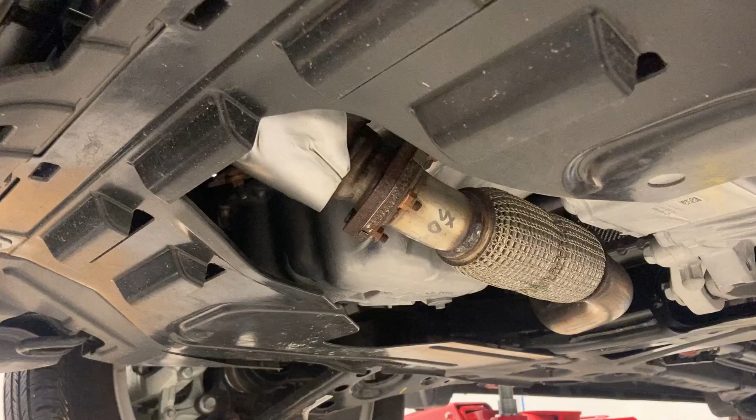Starting out, we're going to be looking at this 2017 Buick Encore. Starting at the exhaust, we go from the header to the first cat, to the flex pipe, to the second cat, the first muffler, down the exhaust tube, into the secondary muffler, and finally out the tailpipe.

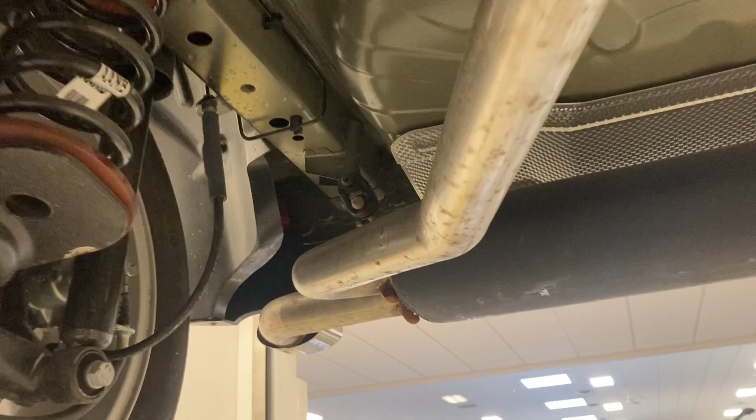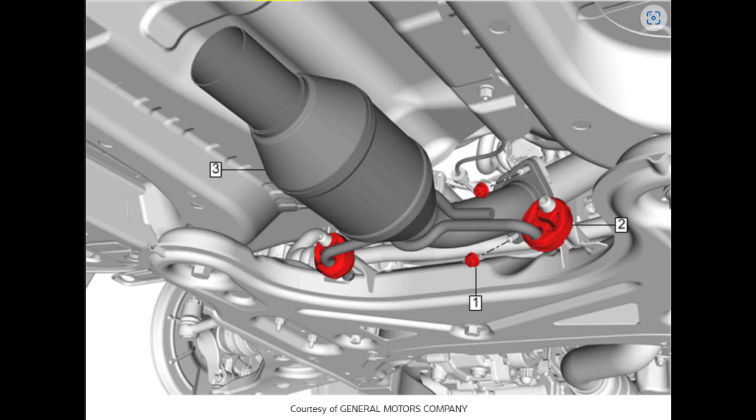The vehicle has two catalytic converters. This is the primary that connects to the outlet flange of the turbo. The secondary cat is slightly further down the exhaust after the flex pipe. Both of these are classified as warm-up three-way catalytic converters.

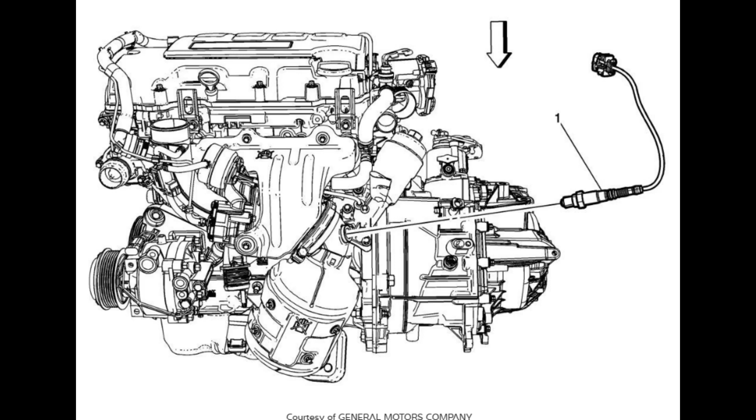Taking a look at the oxygen sensor locations, we have O2S11 here before cat 1 and O2S12 after the first cat, leaving the second cat unmonitored.

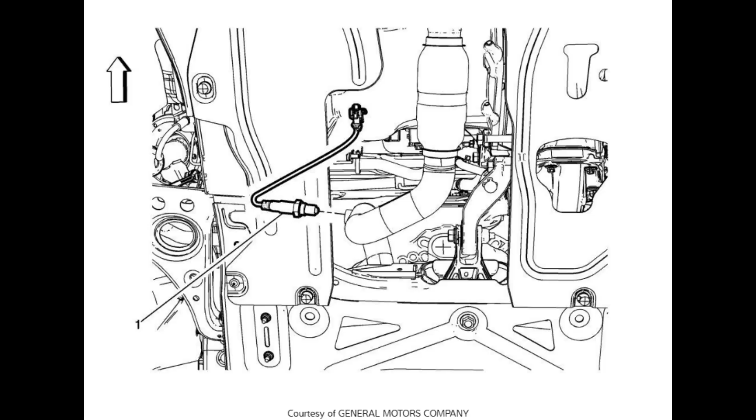Jumping into the tests, clarify that due to the heat shield, we'll be testing the pre-cat 1 temperature through the opening above the heat shield at the header.

Look at the results from our 10-minute idle temperature test. Ambient temp starting was about 70 degrees for both cats. At minute 1, we noticed that cat 1 inlet and outlet have a large difference. Inlet is much hotter at 176 than the outlet at 86, about a 100-degree difference. Cat 2 has less of a difference, actually hotter on the outlet by a few degrees.

Going down to the 5-minute mark, we're at 285 in the inlet, 136 at the outlet, about 150-degree difference, hotter at the inlet of cat 1, whereas cat 2 is a much smaller difference, about 5 degrees, 108 going in, 103 coming out. Down to minute 10, 294 and 194 for the inlet and outlet of cat 1, about a 100-degree difference, colder coming out. And cat 2, 122 going in, 106 coming out, only about roughly 20-degree difference.

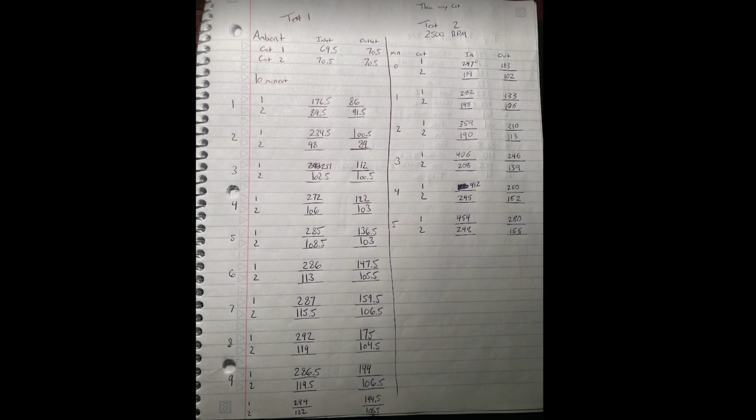Taking a look now at the temperature by foot at idle. Foot 0, 348 degrees at the exhaust manifold. This is our hottest temperature. Foot 1 is the outlet of cat number 1, 275, still considerably hot. Foot 2, 198. Foot 3, we increase in temperature, still just in pipe.

Foot 4, decrease in temperature. This is the inlet to cat 2. Continues to decrease until foot 8, where we increase about 10 degrees from the previous foot, and that is just in bare pipe. Continues to decrease and then finally increases again at foot 10 at the inlet to the muffler, and then gradually decreases to 91 degrees, the coldest temperature at the tailpipe.

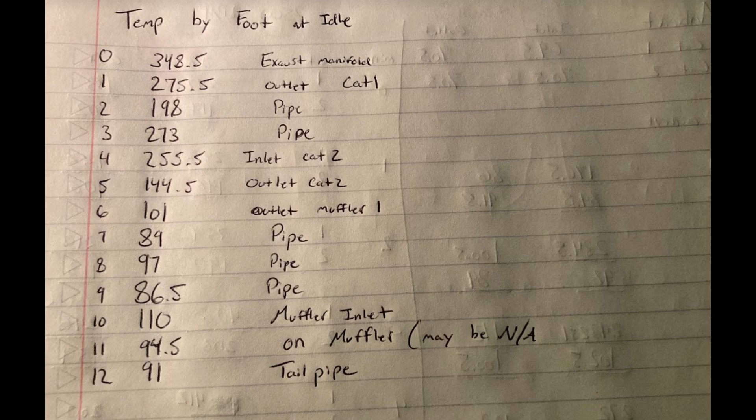Next test, we moved on to a 2007 Buick Lucerne with a 3.8 liter. This car has a single three-way catalytic converter. You can see my partner here, he has his propane hooked up to the intake, and we're going to shoot some in there and monitor what our cat temperature reading says. So I'll have him do that now.

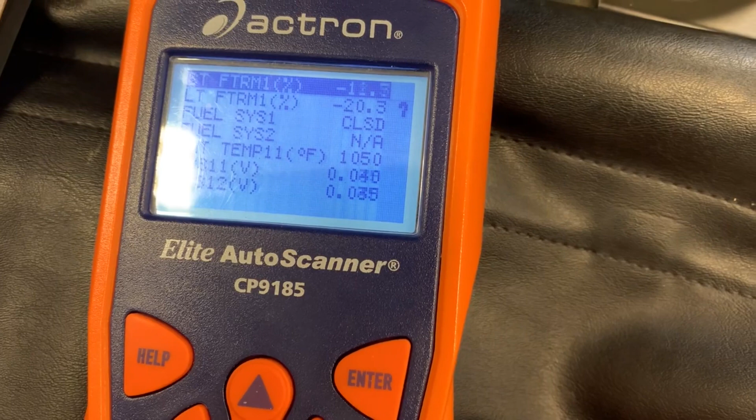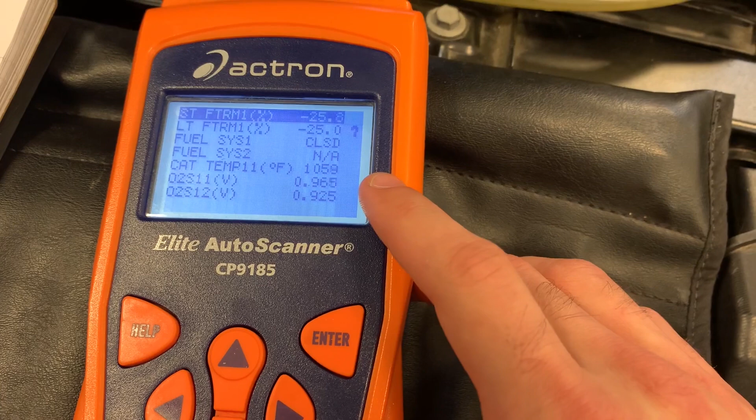So when my partner pushes the button to add propane, our short-term fuel trim is changing, but we don't have much of a cat temperature reading change. It's mostly just stayed around 1060 roughly, 1050 area.

You can see on the left, nearing the beginning of the propane test, our short-term and long-term fuel trims began to decline, while our cat temp PID was around 1050, and nearing the end of the test it rose about 14 degrees, and our fuel trims maxed out at their minimums at negative 25%.

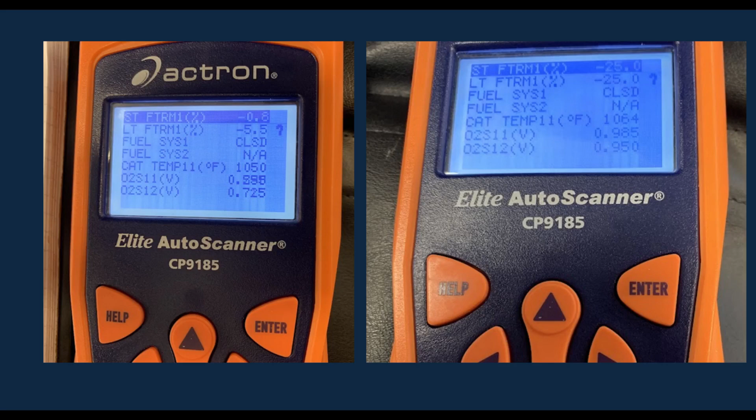Periodic temperature readings throughout our propane testing. Our inlet has always been cooler than our outlet, maxing out at 385 in and 466 out. Not typical light off temperatures yet, but it appears that it is a light off temperature change with the increasing outlet over the inlet temperature.

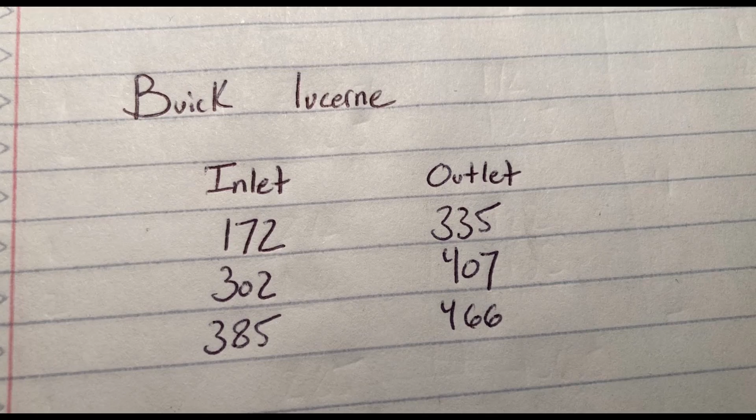How long did it take to fully heat up the converter? Like I said, we didn't have much success with fully heating them up, but we would assume over 10 minutes of normal driving. So idle will be longer, and light driving will be longer as well.

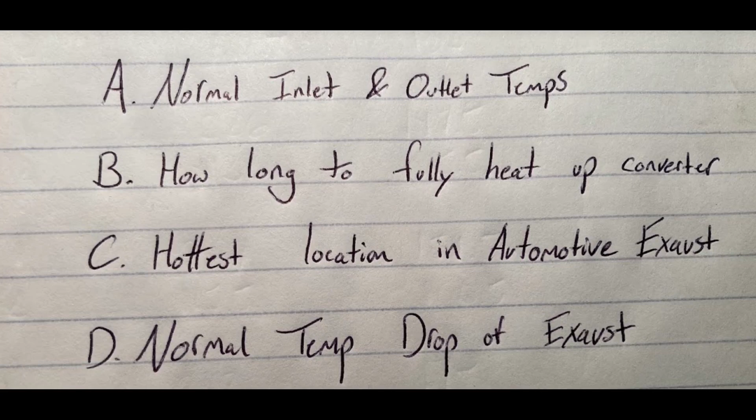The normal temp drop of an exhaust, like we saw in our temp drop test on the first Buick, started at the hottest point and went down to the lowest point. However, with the light-off cat, it'll add in a different step with that 1,000-degree nearing catalytic converter in the middle of the exhaust system. And that concludes it.